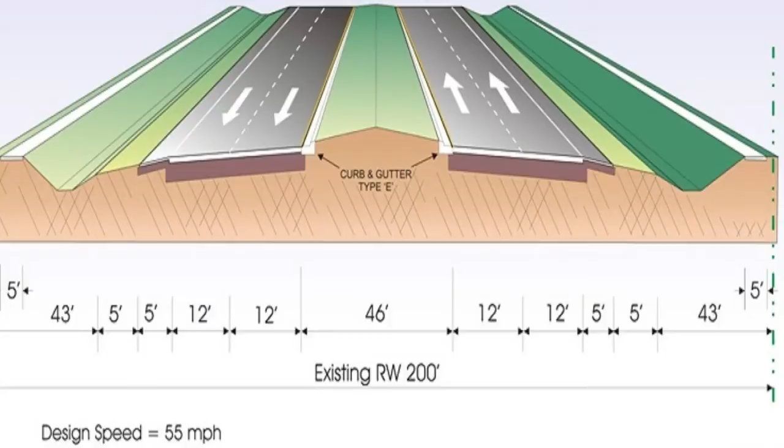But on the side of it, they have a ditch, and then on the side, on top of that, you can make that into a sidewalk, what have you. Okay, so let's show you another one. Then I can show you the fundamentals of, okay, here's another cross section here, but this one they show you right away and the length and all that kind of thing, the width of the road and all that kind of good stuff. Okay, so based on this, if you have a true cross section which gives you cut and fill and what have you, you can do the calculation.

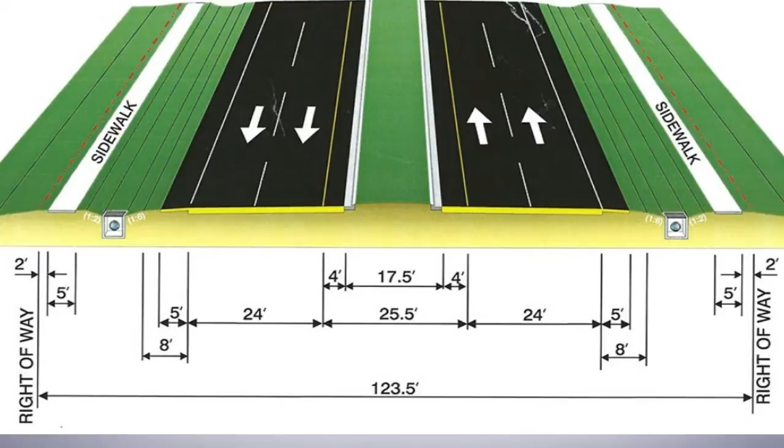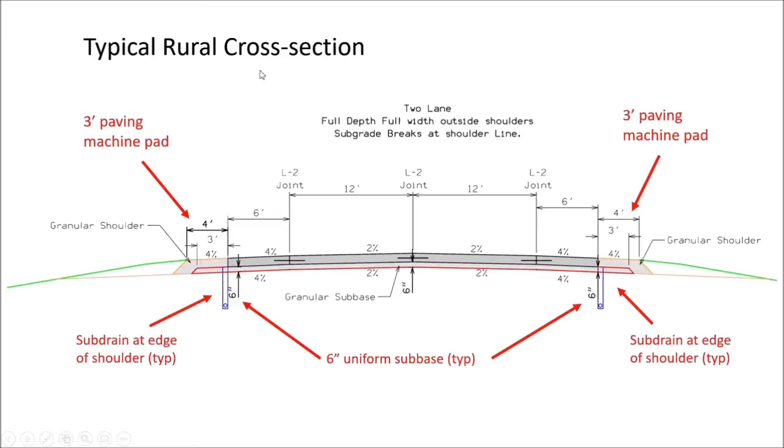One of the things we do in our state in rural areas is we use a concrete cross section. We usually have two 12-foot lanes, two 6-foot full depth shoulders, and you can see they're usually connected with steel at the joint. We have this thing called a 3-foot paving machine pad, and I'll show you what that means in a minute. But that's to allow the paving machine to drive along the side and have a good base to drive on.

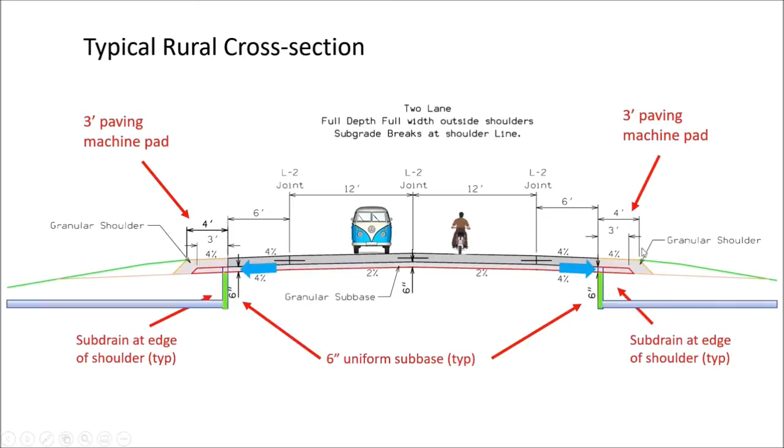We have sub-drains to drain all the water that's underneath the cross section, and it'll drain it out to the medians. And it's a pretty typical cross section, and once we come back and we do the cross section, it's paved, the machine goes off, we'll just cover this up with some granular material, and that's the cross section in the rural areas.

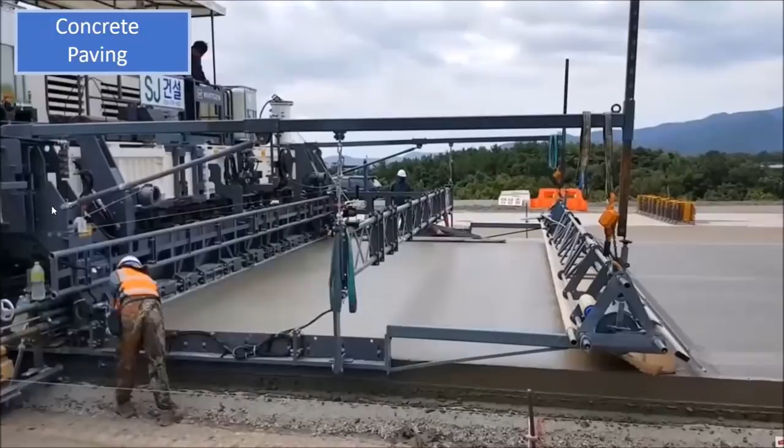You can see here's a concrete paver, here's the loose concrete on the left, and it just pours your cross section. And the cool thing too, it can break it. So what I mean by that is it can break it at 2% each direction and do your cross section all in one go. And that's where the machine pad is needed.

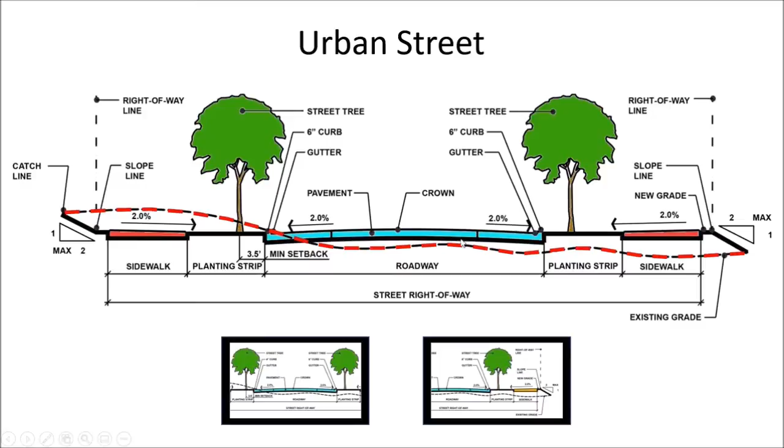So urban streets are similar, and this red line represents a cut line. So this might be you're building a new roadway and this is the existing ground. So you might have to cut this area out and fill this area in over here to build the rest of your cross section. Most cross sections have two 12-foot lanes. It could be up to 4 lanes, 6 lanes, depends where you are in the city.

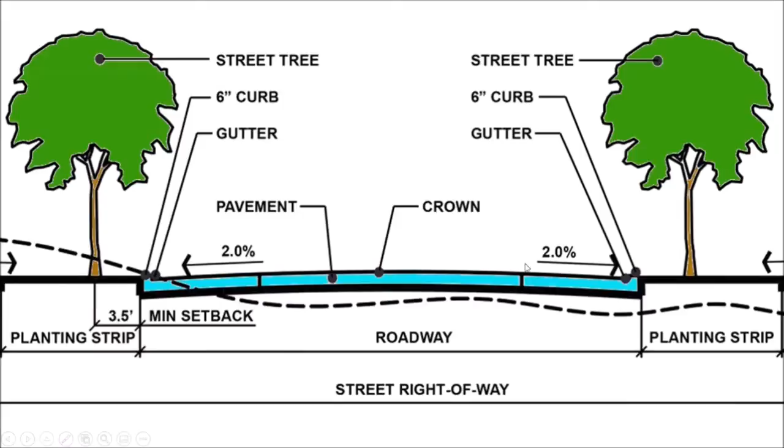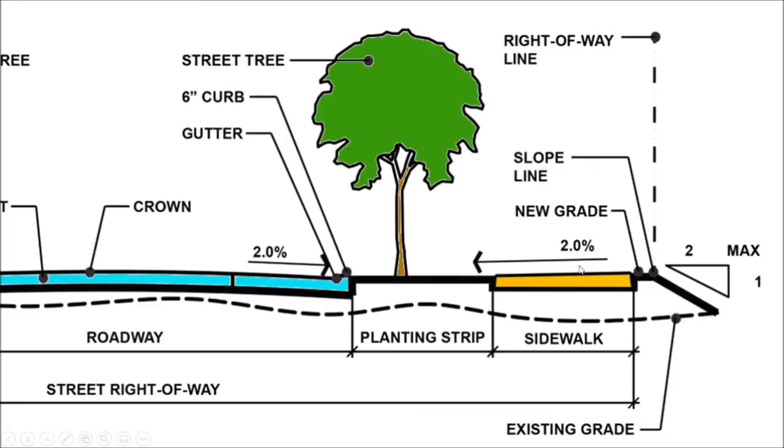2% is typically used to get the water to go off to the curb and gutter on the sides. We have a planting strip, put a little green area in, partially to make it look good and partially to protect the sidewalk where pedestrians are going. In the United States, we have a maximum grade of 2% cross slope. That's for the ADA, the Americans with Disabilities Act, so 2% is the max. And it's a typical urban street cross section.

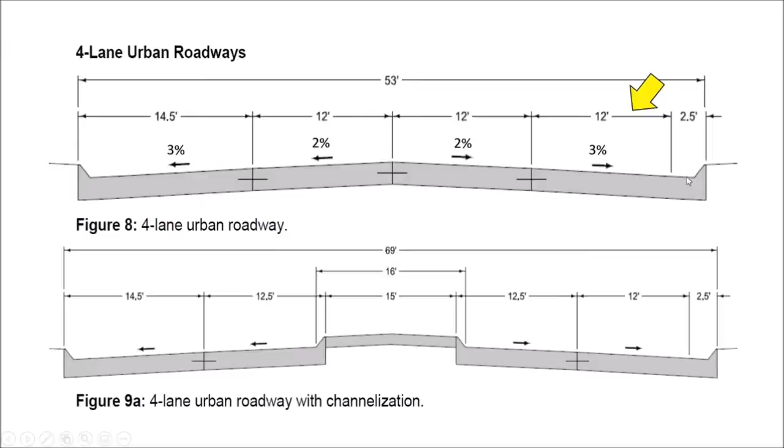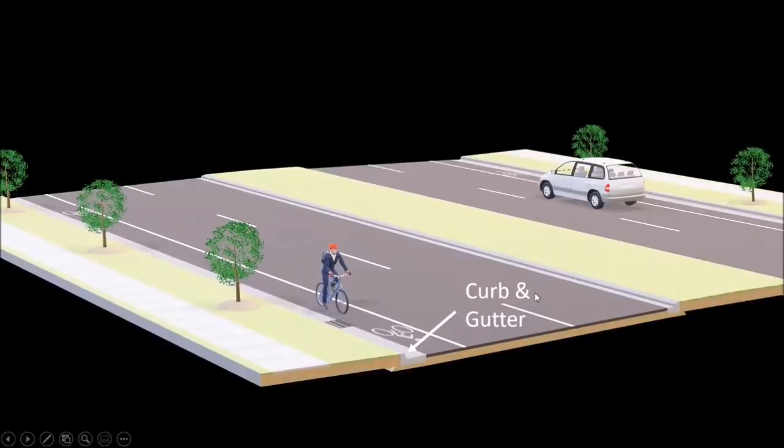And this would be a 12-foot lane with a 2.5-foot gutter over here. Typical cross section, two 12-foot lanes on both sides, a median, some green planting area. Things you got to think about, curb and gutter. You got to have curb and gutter. You're going to need some drains for the water, obviously. Sidewalk. You can see in some urban areas they don't have this green strip because they just don't have enough right-of-way. They don't own enough property to build this sort of thing.

When you're passing someone, you want to see oncoming cars, so you've got to worry about how your profile is working so that you can see other cars. There are 3 types: intersection sight distance, stopping sight distance, and passing sight distance.

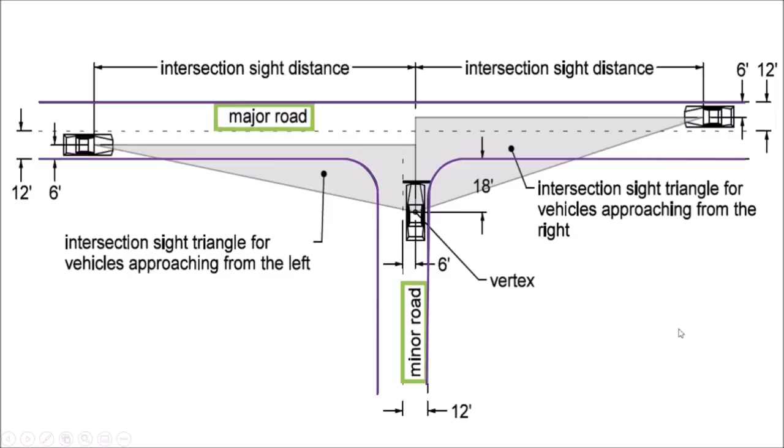So intersection sight distance: there's a car here on a major road, a car here on a major road, and a minor road. There's the cars, and you're pulling in from a little minor road and want to get on the freeway. Well, the other cars can see you. The car on the left can see you at a certain distance. It's usually a triangular sort of system. That's what they're going to say they can see when they're driving along, and they can see the car. That's good. Car on the right, same sort of thing. You're going to be watching your lane and be able to see this car coming into traffic.

So the last thing you want to do is put any trees in here so you block the view of these two cars on the major road. So you've got to worry about intersection sight distances and obstacles that go in these different corners.

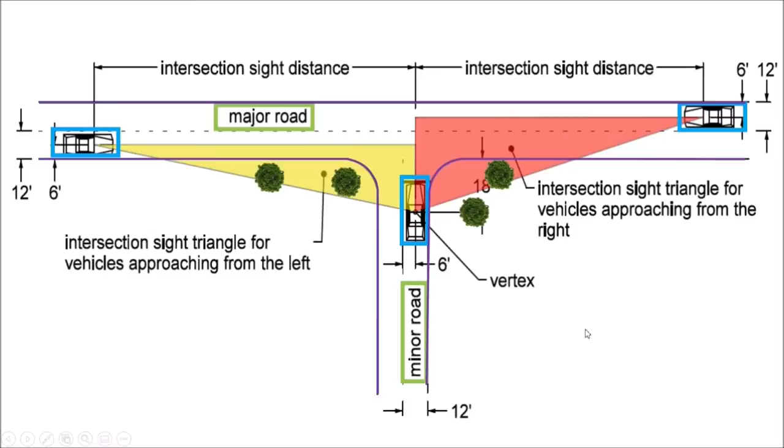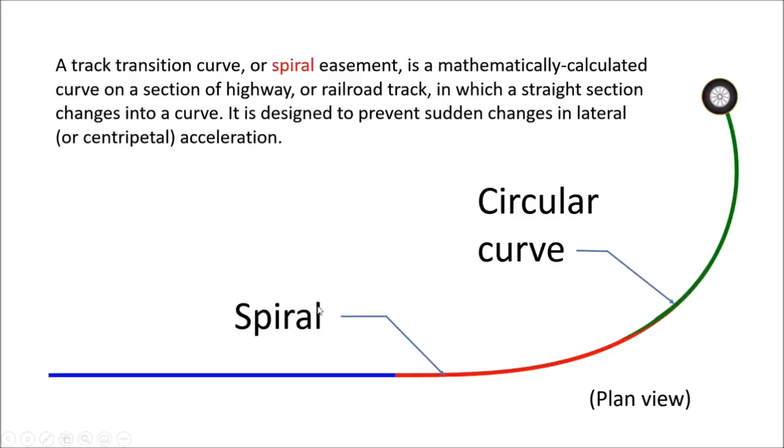The grade on most of the highway is not up to standard. If your car fails in the middle of the road going uphill, you're going to be rolling back down because the grade will not allow your car to just stand, especially if you don't have brakes. So that's why you don't use 8% grading. First of all, with 8%, you're not going to have good sight distance anyway. You use 8% for a private driveway and things like that, but not on a major highway. You want to see as clear as possible because you're moving with speed.

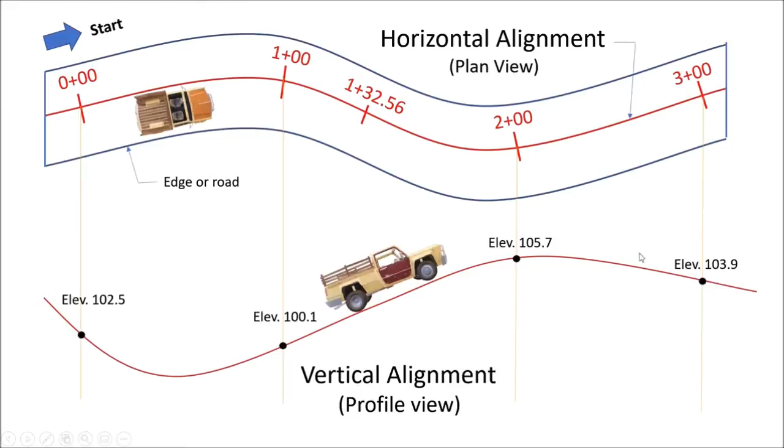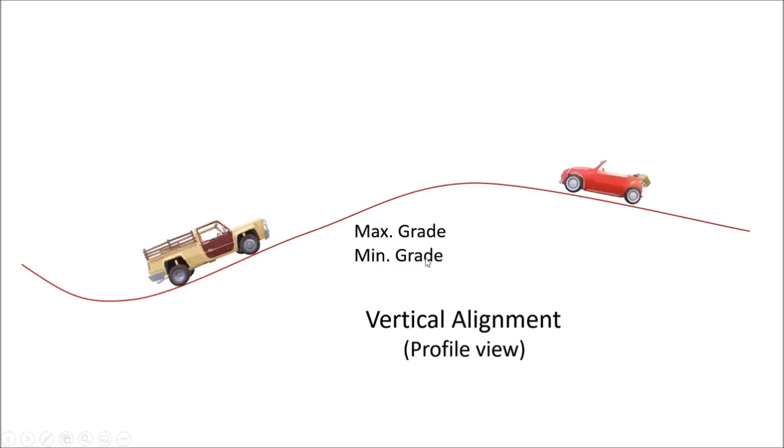When you have a vertical alignment, things you have to worry about are the maximum grade you're allowed and the minimum grade. You don't want a big grade, 11%, because it's hard for trucks to get up carrying a full load. And you don't want a maximum grade going downhill of 15% because it's really hard on the brakes on big trucks. Other things you've got to worry about is sight distance. When you're passing someone, you want to see oncoming cars, so you've got to worry about how your profile is working so that you can see other cars. 3 types: intersection sight distance, stopping sight distance, and passing sight distance.

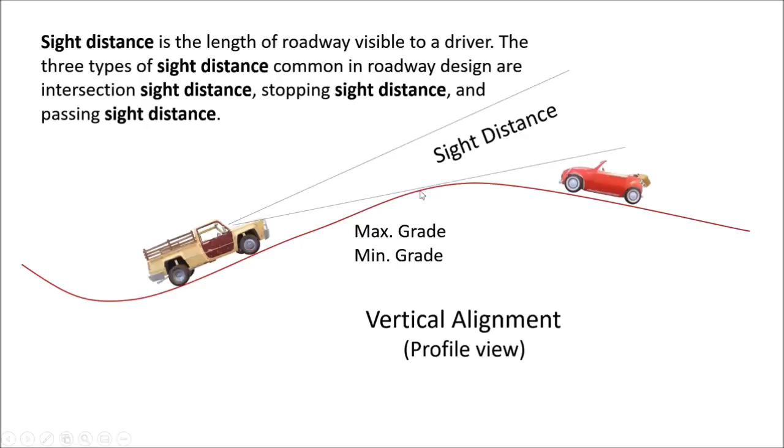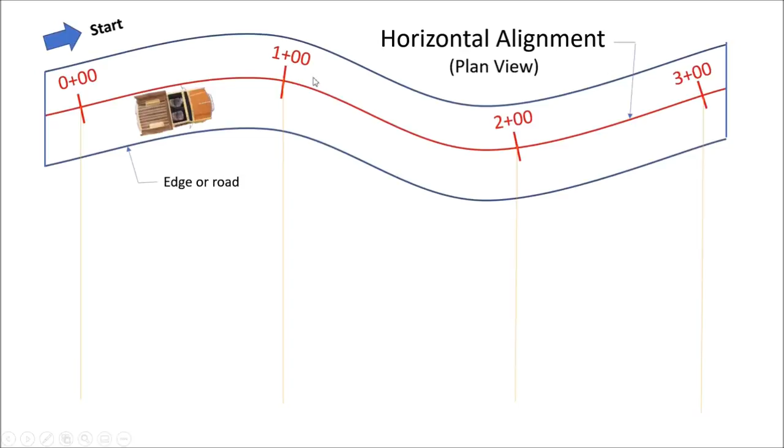Okay, there's an alignment. And they put stations. The reason why they do stations is to be able to know, if you're doing construction, okay, at station 4, 5, 6, or station 6 plus 70. That means 670 feet from 0. Okay? Station 5 plus 50, 550 feet from the 0 point.

So then, okay, what's happening at station 550 feet? Well, that's the beginning of the driveway. Where is this driveway? It's on the left-hand side. You do those in the layout, and you put all of those points on them. As a designer, you label all of these things so that when the contractor comes, he knows where this driveway is supposed to go.

He knows what the radius of that driveway is supposed to be. So all of these things are taken into consideration during your design. And that's why the station helps you to identify the area as long as you're moving along the station.

The alignment is also a line that you base your design off of. Most of the time, alignment is usually in the middle of the road. But sometimes some other people put it in the curb, and you can do whatever you want to do. But the main thing is alignment is supposed to be in the middle of the road. So you use the alignment when you put it in the middle of the road.

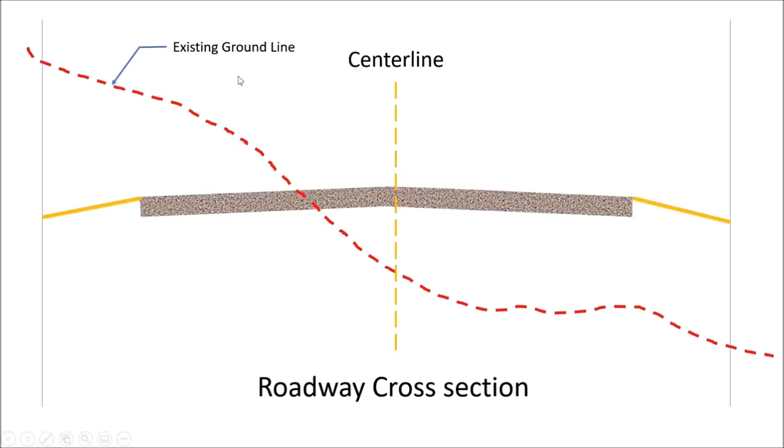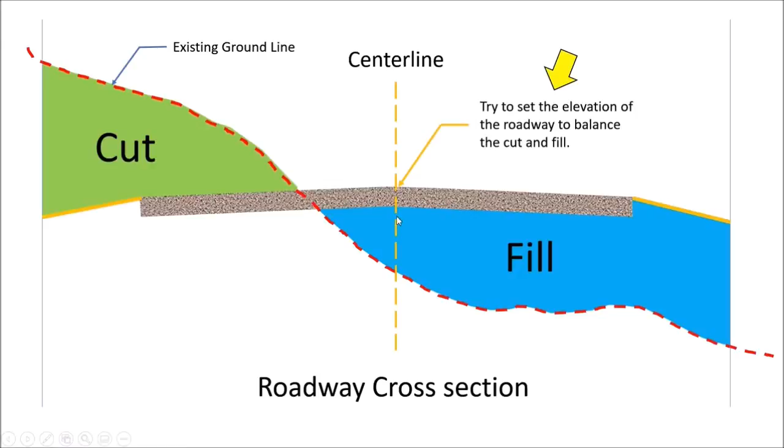Typical roadway cross-section. If you're building new, your existing ground might look like this. So one of the things you want to do, you've got to be aware you're going to cut this material out and you're going to need to fill this material in. So when they want to do a mass balance of cut and fill, they try to put the roadway somewhere that this cut can fill this fill.